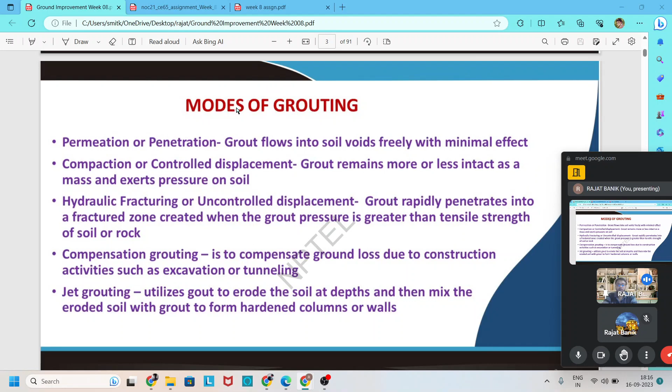The next slide shows different grouting techniques, a schematic diagram of the different grouting techniques. The first one shown here is also about permeation grouting. We apply the grout through the pipe, and no pressure is applied. Through gravity only, the grout material enters or penetrates the surrounding soil, and then the soil is improved.

The next one is compaction grouting, where we apply grouting through pressure, and due to this pressure the surrounding soil may compact. By this way we improve the ground. The third one is hydrofracture grouting. Due to the high pressure, the surrounding soil or rock may crack. After that, the grouting material enters into the surrounding soil and improves the soil or rock.

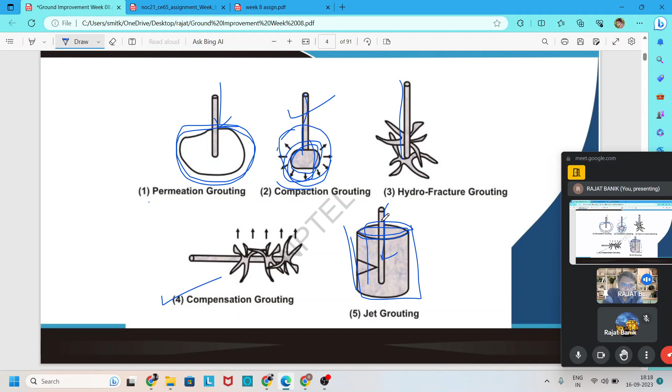The fourth one is compensation grouting. Here we actually apply the grout material into the soil where material is lost due to excavation, and we repair the surrounding soil or fill the material which is lost. Jet grouting is similar - we apply grouting material through a pipe by pressure, and this material mixes with the surrounding soil, forming a hardened column-like structure. By this way we improve the surrounding soil.

Now we discuss the objectives of grouting. Most of these objectives are common to all ground improvement techniques. The first one is densification, to prevent or arrest settlement and mitigate liquefaction. In most cases, the grouting technique is used to densify the surrounding soil, reduce settlement or mitigate liquefaction, and also used for soil solidification to increase the cohesion of granular soil - that is, the bonding between soil particles. To increase the bonding between soil particles, we use this grouting technique.

Then it is used for reduction of permeability and water control. This means the permeability of the soil may reduce due to the application of grouting, because the void spaces and soil pores are filled by the grouting material. Due to this reduction of permeability, water does not flow to that region, and the region may become waterproof. It is also used to stabilize and reduce the expansion of soil, for compensation of lost ground and filling large voids, and for additional support for existing structures.

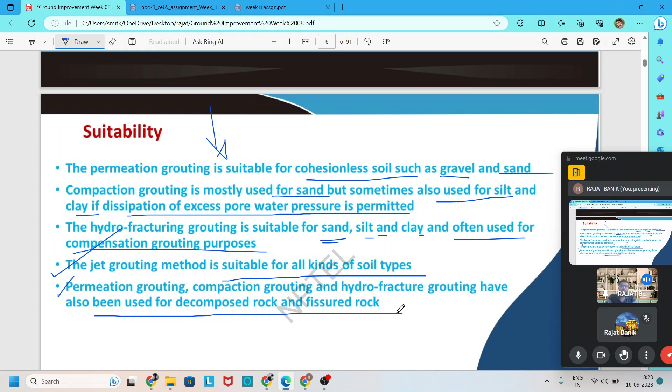This means the rock is gradually decreasing in volume and converting into soil particles. To stabilize or improve that type of rock, most of the time we use permeation grouting, compaction grouting, and hydrofracturing grouting.

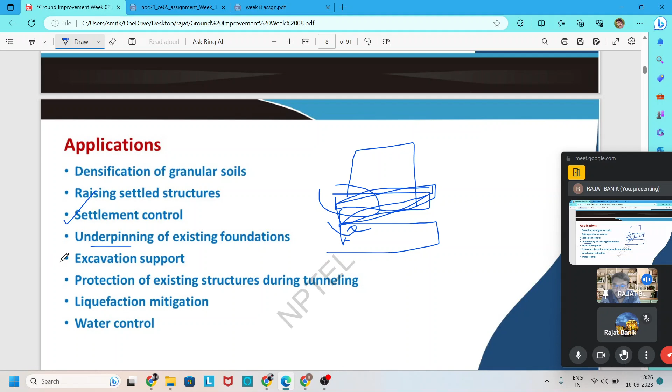It is also used to support excavation. That means if we excavate a tunnel, the tunnel wall is stabilized through this grouting, or by injecting the grouting material. This purpose is also served by this grouting method, and it is also used for protection of existing structures during tunneling, as I already discussed, and also used to mitigate liquefaction.

Liquefaction happens when there is loose sand present and water is not properly dissipated. If we apply the grouting material into the soil, the void space of soil filled with water is filled by this grouting material, and this soil is no longer allowed to retain water there, so the liquefaction phenomena may be mitigated by this grouting technique.

Control of water is similar to liquefaction in that it reduces permeability through injection, so water does not flow through the soil and hence does not hamper the existing foundation. This is how we control water flow into the soil.

Now let's discuss the advantages. With this grouting technique, there is no need to remove or replace the soil of the existing structure or ground. Simply by injecting a chemical solution, we improve the soil.

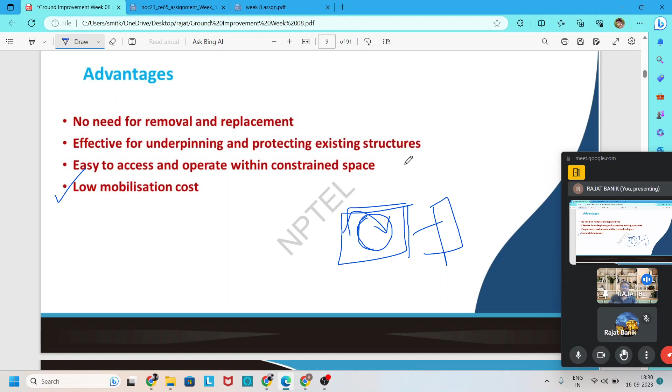The last advantage is low mobilization cost. This means when moving from one point to another, the mobilization cost with this grouting technique is very low.

Now let's discuss some disadvantages. The quantity of grout required is hard to estimate - it is very difficult to understand what amount of grout material is needed to improve the soil.

The effectiveness of the application cannot be predicted. We cannot judge after application how suitable the grouting material is or how much it improves the existing structure, so the area of improvement is sometimes uncertain.

Uncontrolled grouting may cause ground movement and distress to existing structures. Due to the pressure of the grouting material, ground movement may occur, causing settlements in existing structures, and these structures may even collapse if the pressure exceeds the allowable pressure of the soil.

Certain chemical grouts may contain toxicity and have adverse impacts on groundwater and the underground environment - the chemicals mixed with groundwater may toxify it. Also, specialty contractors are required for the operation.

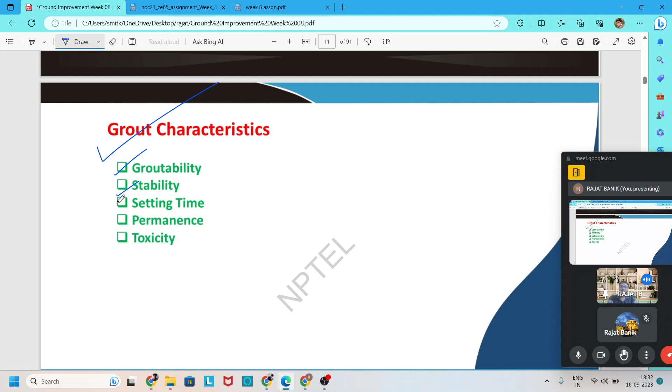Now let's discuss some grouting characteristics: groutability, stability, setting time, permanence, and toxicity. We will discuss these one by one, starting with groutability.

To obtain satisfactory performance, grain size distribution should be known, as it shows the relationship between the grout particle size and the void dimension. This groutability - whether the grouting is applicable to the soil - is mostly based on the grain size distribution, that is, the particle size distribution.

We find out and identify what type of grouting method should be used for a given soil.

We also need to address the pumping pressure - it should not be large enough to disturb the soil particles. When grouting is applied under pressure, the existing soil should not be disturbed; the grouting pressure is limited to 20 kilonewtons per meter square.

The quality of the grout must be sufficiently fluid to enter the soil quickly - fluidity should be maintained to enter the void spaces - but the movement should not be too far.

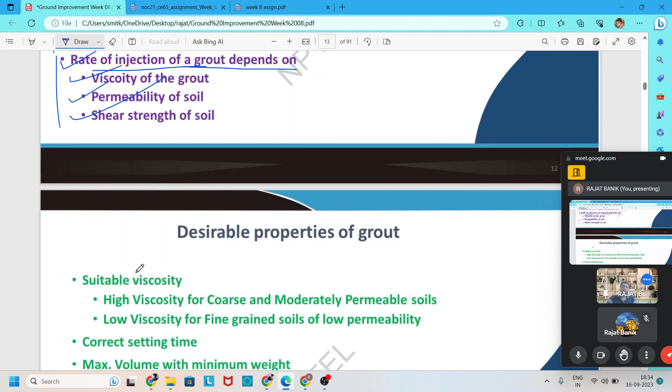Now we discuss the suitability and desirable properties of the grout. The suitable viscosity means what viscosity we maintain when we apply this grouting material. It is said that high viscosity is used for coarse or moderately permeable soil, and low viscosity is used for fine soil of low permeability.

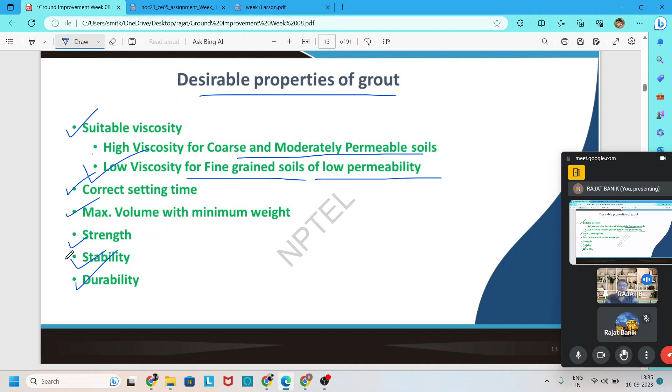Then we also need to adjust the correct setting time, meaning it should not be very slow or very fast. Then the maximum volume within minimum weight, meaning the volume of the grouting material should be maximum with minimum weight. And also we need to adjust the strength, stability, and durability during our application.

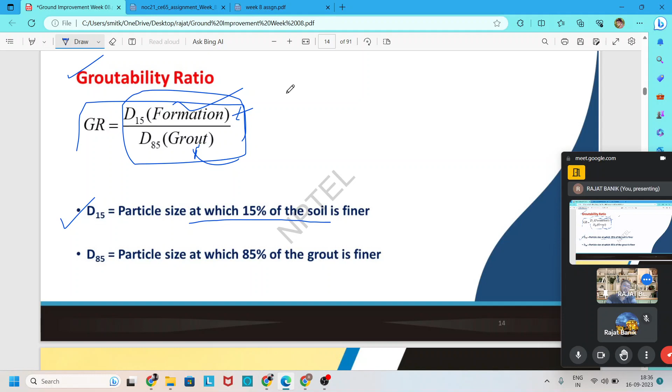This groutability is defined by a ratio called the groutability ratio, which is the ratio of D15 by D85. D15 is used for the formation, that means already existing soil, and D85 is used for the grouting material. D15 is the particle size at which 15% of the soil is finer, and D85 is the particle size at which 85% of the grout is finer. So by this formula we find out the groutability ratio, and based on this ratio we know whether this soil is suitable for a different grouting technique or not.

Now we discuss other characteristics: stability, setting time, permanence, and toxicity. Stability is the capacity of the grout to remain in a fluid state and not segregate into separate components.

Setting time is the time required for the grout to set into a cement mass or gel. It is discussed that early setting time causes difficulty for the grout in reaching its destination. If the grout sets very quickly while we apply it through a pipe, and our targeted depth is further down, it may not reach that targeted depth because it has already set before reaching it.

Also, the setting time should not be very late or slow, because if it is very slow, it causes the grout to be washed away if seepage is occurring through the soil. That means if the setting time of the grout is very large, due to rainy season or water flow or seepage, it may be washed out. So the grout setting time should not be very large either.

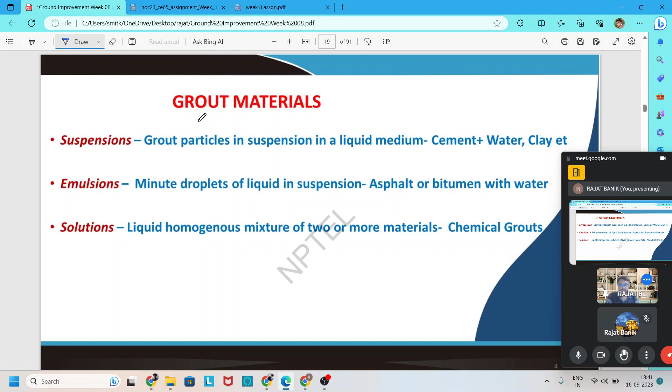Now we discuss one by one this grouting technique based on the material. First one is suspension grout, where we use suspension with cement. It is said that it is unsuitable for cracks or voids narrower than 0.2 mm. If the void is less than 0.2 mm, this method is not suitable. This grouting is usually formed by OPC and water, the mixture of OPC cement, ordinary Portland cement, and water.

The water cement ratio should be maintained between 0.5:1 to 5:1. Rapid hardening cement is used when we apply this grouting into flowing water. And when there is fissured rock, we apply super sulfated cement.

It is also said that admixtures such as bentonite are used to keep the cement particles in suspension. Bentonite, one of the clay minerals, is used during suspension grouting to maintain the cement particles in suspension. The application of this suspension grout is seepage cutoff beneath the dam and groundwater control. We cut the seepage under the dam, and we also use this suspension grout to control the groundwater table.

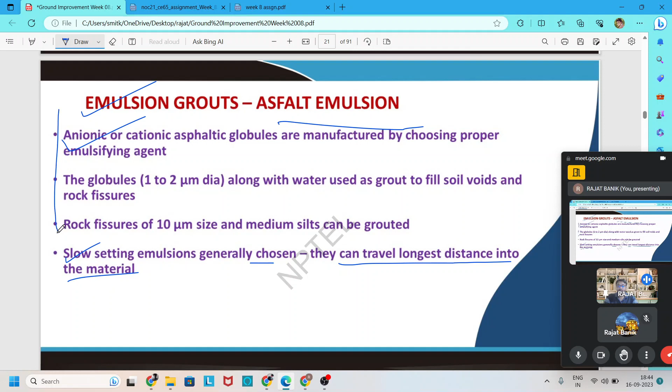Next is emulsion grout, where we use asphalt emulsion. Anionic or cationic asphaltic globules are manufactured by choosing a proper emulsifying agent, and the globules are sometimes 1 to 2 micrometers in diameter. Along with water, this is used as a grout to fill soil voids and rock fissures. Rock fissures of 10 micrometer size and medium silts can be grouted. Slow setting emulsion is generally chosen since it can travel the longest distance into the material. By this way, we apply this emulsion grout into the soil at different points.

Now we discuss the solution grout, which in most cases is chemical grout, called chemical grouting. Chemical grouts like silicate and acrylic resins are used in solution grouting, and this solidifies by chemical reaction alone, solidifying the soil mass. This is used for seepage barrier and stabilization of soil around the tunnel, based on the principle of injection or permeation grouting. By this way, we apply the solution grout into the soil.

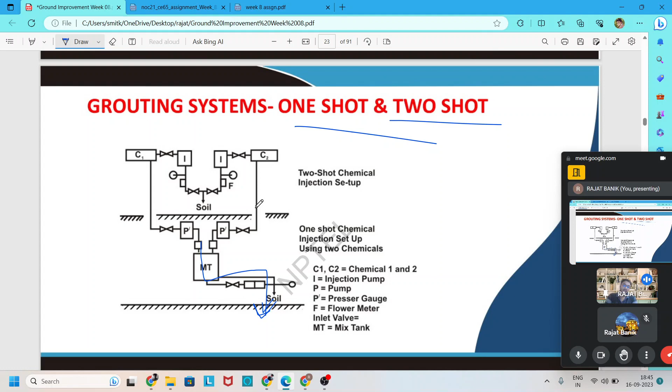Now we show two types of systems applied for chemical or solution grouting. We apply two methods: one-shot method and two-shot method. In the one-shot method, we apply the solution only one time. In the two-shot method, we apply one chemical, and after some time apply another chemical. By this way, we improve the ground.

So we discuss this in tabular form: the one-shot system and two-shot system. In the one-shot system, all chemicals are injected together after pre-mixing. In the two-shot system, one chemical is injected followed by injection of a second chemical, which reacts with the first to produce a gel which subsequently hardens.

In the one-shot system, setting time is controlled by varying the catalyst concentration according to the ground concentration, water composition, and temperature. In the two-shot system, it is slower and requires higher injection pressure and more closely spaced grout holes. By this way, we apply the one-shot system and the two-shot system into the ground.

Now we discuss the grouting procedure: how we apply, by what method we select the grouting technique in the field. This depends on the material to be grouted.

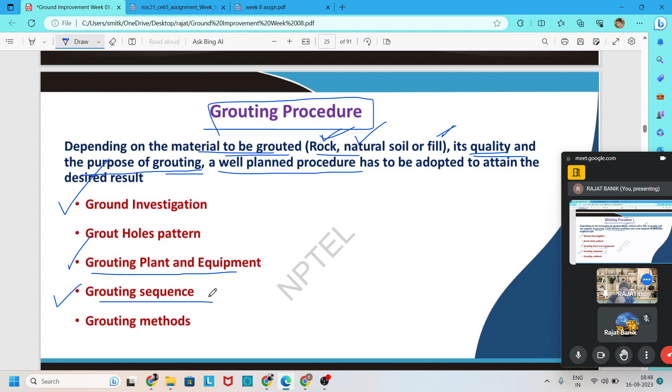So the first one is ground investigation. Most of the time, the preliminary step is ground investigation. It provides information regarding the ground, whether it can be grouted or not, and the choice of grout types and amount, what type of grout is applied and what amount. It also sometimes includes a geological survey, drilling boreholes, and collection of samples for laboratory tests.

Now we discuss the grout holes pattern. Most of the time it is based on the nature of the work, number of drill holes, depth, and pattern to be defined. It follows a grid pattern such that the radius of penetration is sufficient to cause slight overlapping between the adjacent holes.

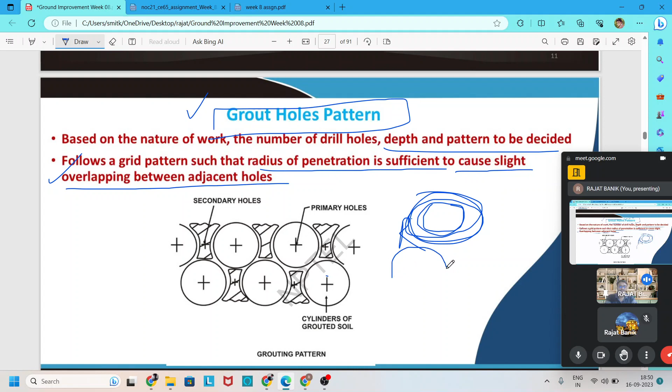We know that the effectiveness of the grouting material cannot be properly found out in practice. So theoretically we find this out, that up to some radius we apply the grout as a circle. But theoretically we find it, while in practical application many factors come into the picture, so this circle may be reduced. As a precaution, the grouting radius should be sufficiently higher, slightly overlapping the adjacent hole. By this way we apply grouting into the field.

So two types of holes are mainly applied. First is primary holes, second is secondary holes. In primary holes we maintain one grid pattern, which you can see here is a triangular pattern. But after applying this grid pattern, some space remains. So to fill this space, we make another hole to apply the grout. This hole is called the secondary hole, used to fill the remaining space.

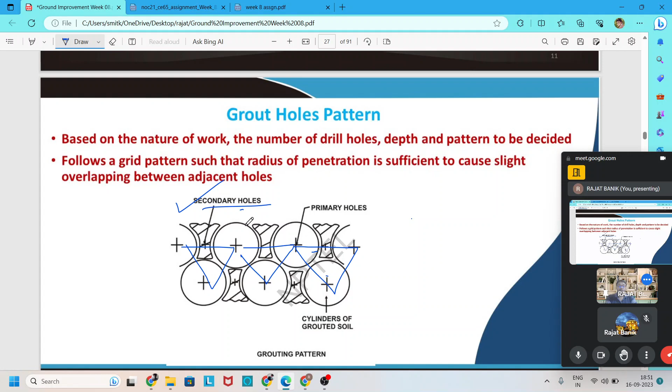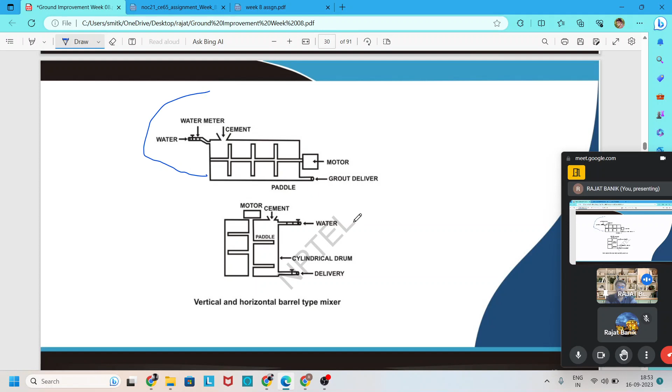Here one picture is shown for the different equipment used during grouting, and also another picture is shown for the mixer, with different plan view and cross section view. The motor is also shown, with cross section and plan view elevation. This picture shows the equipment used in this grouting technique.

Now we discuss one by one the different types of grouting methods: permeation grouting, jet grouting, compaction grouting, whether it is suitable, how it is applied, and hydrofracture grouting as well. So the first one is permeation grouting, which we already discussed a little bit. Please wait a few seconds.

So, permeation grouting.

Grout fills the pores without any volume change. Includes cement grouts, bentonite grouts, and chemical grouts. That means through gravity only, without any pressure, this grouting technique is used.

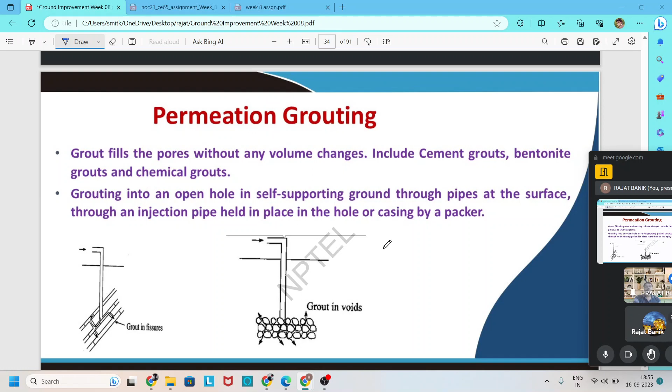So by this way, we apply permeation grout into the soil. You can see here, only through a pipe, grout in fissure or grouting in the pipes in soil. This is applied for the soil, and this is applied for the rock.

Application of the permeation grout: mostly used for seepage control, soil solidification, and stabilization. For seepage control, for making the vertical seepage barrier beneath the hydraulic structure, this permeation grouting is used. Also, to stop seepage through the joints of underground structures such as tunnel lining and basement wall it is used. And for soil solidification and stabilization around the tunnel and shaft, this permeation grout is also used.

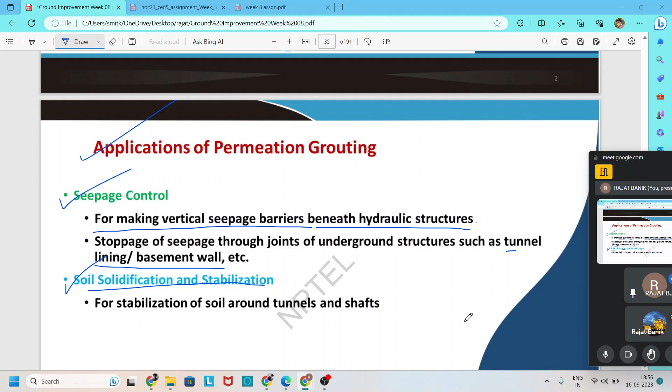Now we come to compaction grouting. It is a good option if the foundation of an existing building requires improvement, since it is possible to inject the grout from the side or at an inclined angle to reach beneath the building.

This type of compaction grout is mostly used for existing structures to improve the soil under the existing foundation and raise the foundation level, because soil degradation sometimes happens after construction, and settlement may occur. So to improve this existing structure, compaction grout is mostly used.

In compaction grouting, a bulb-shaped grout mass is formed. During this process, the bulb-shaped grout mass is formed, and in most cases it is used as a soil-cement grout.

This can also be performed as a pre-treatment before the structure is built. Sometimes we also use this type as a pre-treatment before construction.

Now come to the application. It is mostly used for the densification of loose strata, that means densifying loose soil beneath the foundation, or for floor slab jacking. For this, compaction grout is mostly used.

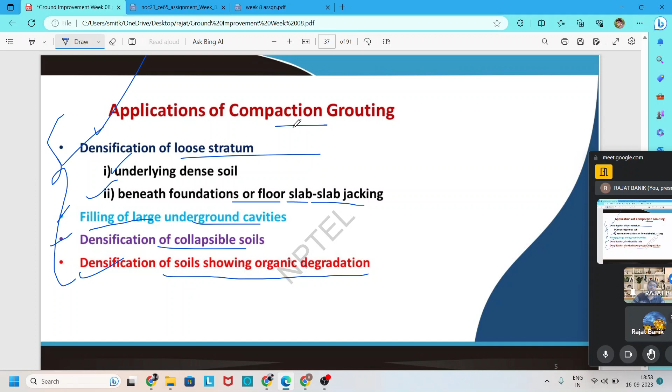Now come to jet grouting. It involves the injection of low viscosity liquid grout into the pore spaces of granular soil. This creates hardened soil to replace loose liquefiable soil.

Jet grouting is used as a replacement technique in which soil ranging from silt to clay and weak rock can be treated. This method consists of lowering a drill pipe into a 150 mm diameter bore. The drill pipe is specifically designed to simultaneously convey pumped water, compressed air, and grout.

Three systems of jet grouting are applied: single, double, and triple. Here three pictures are shown. The first is single jet grouting, the second is double jet grouting, and the third is triple jet grouting.

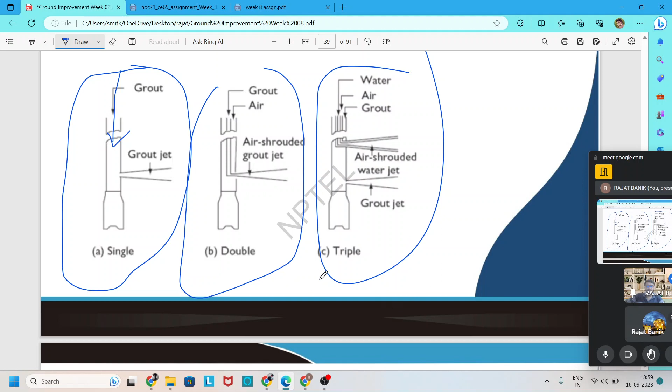In single jet grouting, we apply only the grout material. In double jet grouting, we apply grout and also compressed air. In triple jet grouting, we apply water, compressed air, and also the grouting material. So in these three different ways, we apply the grouting material by the jet grouting technique.

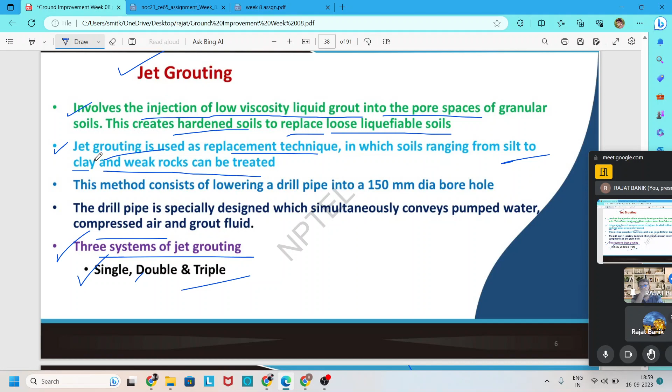Now we discuss the application of the jet grouting technique. It is mostly used for groundwater control, to prevent flow through the sides or into the base of an excavation, or to control groundwater during tunneling, to prevent or reduce water seepage through water retention structures such as dams or flood defense structures, and also to prevent or reduce contamination flow through the ground.

In these different ways, we control groundwater through jet grouting. Another application is for movement control, used to prevent ground or substructure movement during excavation or tunneling, and also to support the face or sides of the tunnel during construction or in the long term.

It increases the factor of safety of embankments or cuttings, and it provides support to piles or walls to prevent or reduce lateral movement.

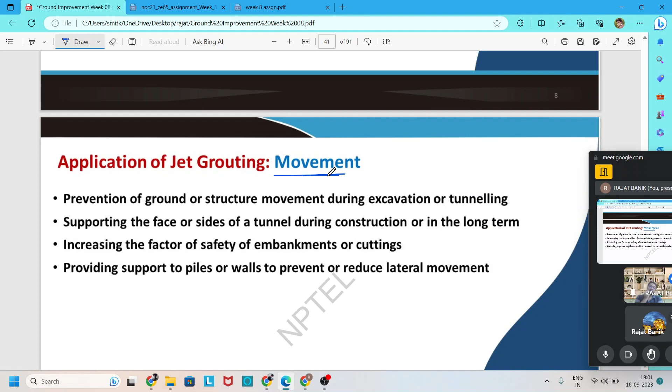It is also used as a support, for underpinning buildings during excavation or tunneling, to improve the ground to prevent failure through inadequate bearing, and to transfer foundation load through weak material to a competent stratum.

It is also used for environmental purposes: capturing contaminants in the ground to reduce or prevent contamination spreading into sensitive water systems, providing a lateral or vertical barrier to contaminated flow, and introducing reactive material into the ground to treat specific contaminants by creating permeable reactive barriers.

So this jet grouting technique has a wide number of applications: controlling groundwater, controlling ground movement, providing support, and serving environmental purposes. This is one of the most important techniques for grouting, and jet grouting can be used for a wide range of soil particles - basically any type of soil can be improved using jet grouting.

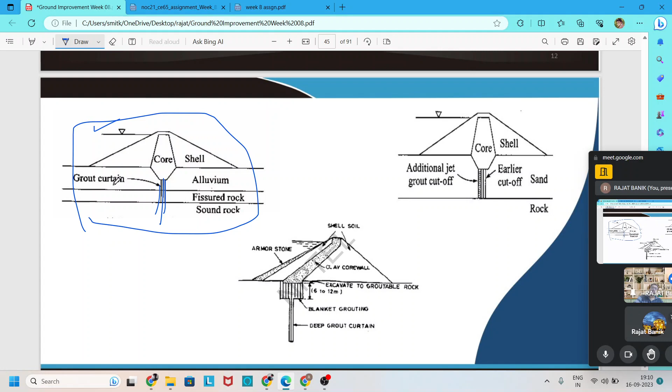Here some figures are given. Most of these figures are for dams, like earthen dams. To cut the seepage, mostly below the dam, we use this type of grouting technique. We can say first here it is grout curtain - here you use jet grout cutoff, here you use blanket grouting or deep grout curtain.

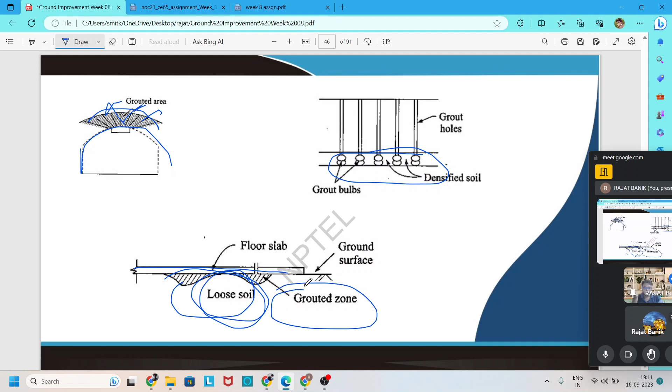There are other pictures shown here for jet grouting, showing this bulb-like structure - that means compaction grouting is applied through this bulb-like structure, and we improve the ground. One picture also shows an existing foundation, where below this existing foundation through a pipe, by grouting we improve the existing soil and improve the ground.

Now we discuss the theory of injection - that means the injection pressure, the radius of the influence zone of the grout material, and the height of the grouting pipe. We discuss these one by one now.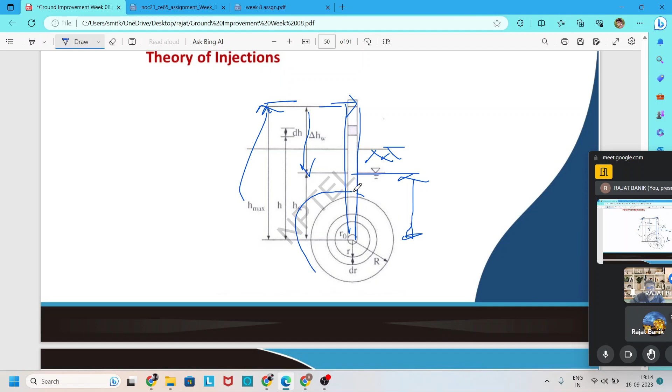First, the theory of injection. We can say there is existing soil present, and the groundwater table is at a certain level, and we need to improve the soil below the groundwater table. A pipe is inserted, and through this pipe the grout material is injected under some pressure. The pressure head before applying the grouting is H max, and after some time this pressure reduces and comes to the height of the groundwater table. Due to applying this grouting material through the pipe, the grout material spreads to the surrounding soil, and the maximum distance it covers is R - that means one circle is formed up to that much distance.

We can say the grouting material penetrates into the soil. So it is a theoretical base, meaning some assumptions we can make to find this out.

The first assumption is that the ground is uniform and isotropic. Most of the time we assume that, and also assume that the grout is Newtonian fluid.

We know in fluid mechanics there are different types of fluid: Newtonian and non-Newtonian. Newtonian fluid is proportional to the shear strain, rate of shear strain, but non-Newtonian fluid is not proportional to the rate of shear.

So here the assumption is that the grout material is Newtonian fluid, but most of the time it is not true. Then another assumption is that the grout is injected from the bottom of the pipe, meaning at the bottom only the grouting material is injected. The grout penetrates to a radius r, spherically.

That means we assume one sphere is formed when we apply the grout material through a pipe. Due to spray, the radius of the sphere is r, we assume. So now we apply Darcy's law.

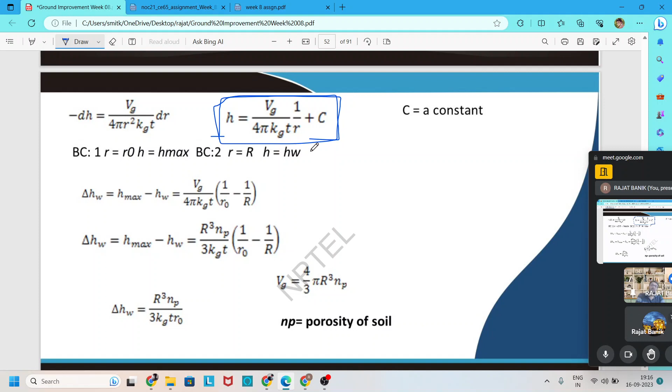Now we apply integration and come to one formula: h is equal to Vg by 4 pi k g T into 1 by R, plus C, a constant. H here is the height, any arbitrary height from where we apply this grouting material into the soil.

And R is the penetration radius, meaning up to what distance this grouting is penetrated. We assume it is smaller.

Now we apply the boundary conditions. The first boundary condition is that R is equal to R naught and H is equal to H max. The second boundary condition is R is equal to capital R, H is equal to HW.

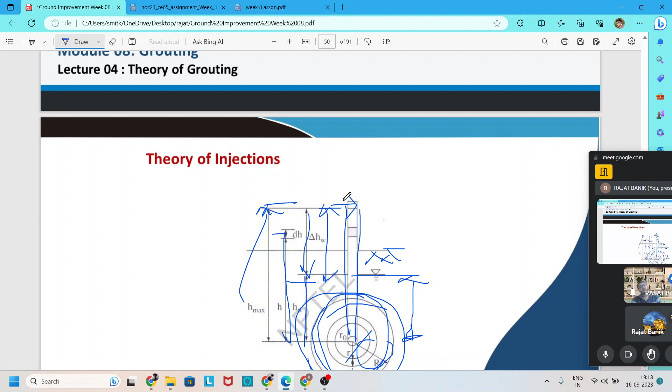Here HW is the height of the groundwater table from the grouting point, and del HW is the head difference between the grouting pressure and the water table.

After putting in all the boundary conditions, we come to one formula: Hmax minus Hw, that means del H. And if we replace Vg by the volume of the sphere, that means 4 by 3 pi r cube into Np.

Np here is nothing but the porosity of the soil, meaning how much void is present. We replace Vg by this formula and, after simplifying further, we come to the final form of this formula.

That means del HW is equal to R cube into Np divided by 3 kg T, divided by R naught, where R is the maximum distance or radius covered by the grouting material, Np is the porosity, Kg is the permeability coefficient of the grouting material, T is the time taken for penetration, and R naught is the radius of the grouting sphere.

Now we modify this formula for our different needs. First we modify it to find the time T, and then we modify it to find the radius of penetration, the mixing radius, of the grouting material.

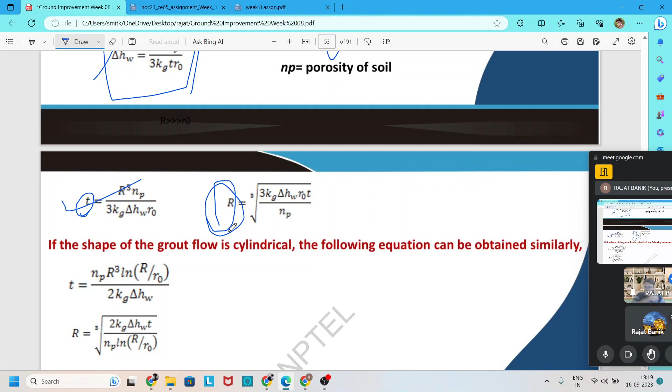All the formulas discussed until now are based on the assumption of spherical flow, meaning after applying the grouting material, one sphere is formed. But sometimes this sphere is not formed; sometimes a cylinder is formed instead.

For that, we modify our formula based on the cylinder, modifying the time T and the radius R. So by these two formulas, we easily find the time and radius for the cylindrical pattern or shape of the grouting.

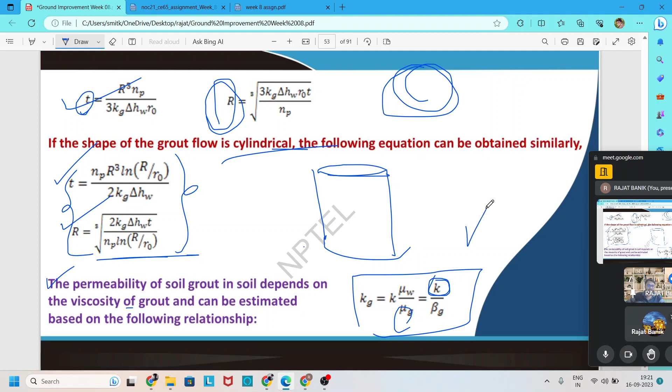One point given is that the permeability of the soil grout depends on the viscosity of the grout and can be estimated by this relation: Kg equals K into mu W by mu G. This can be further modified using K by beta G, where K is the permeability of the soil, mu W is the viscosity of water, mu G is the viscosity of the grout, and beta G is the ratio of mu G by mu W.

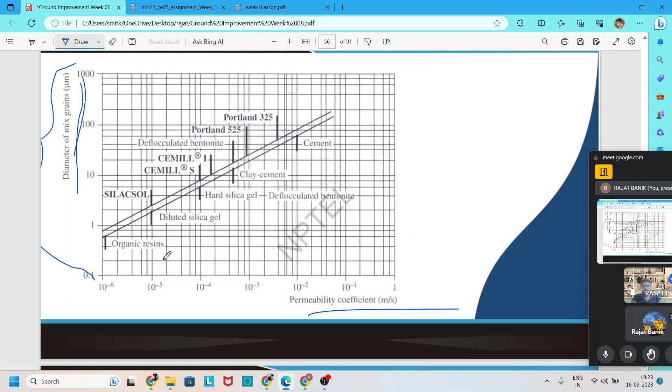Now we come to another grouting technique called compaction grouting. In compaction grouting, we inject a stiff or low mobility grout to apply pressure on the surrounding soil and displace the soil particles. A grout bulb is formed around the grouting source. If the grout bulb is simplified as a sphere, the pressure within the bulb is equal in all directions.

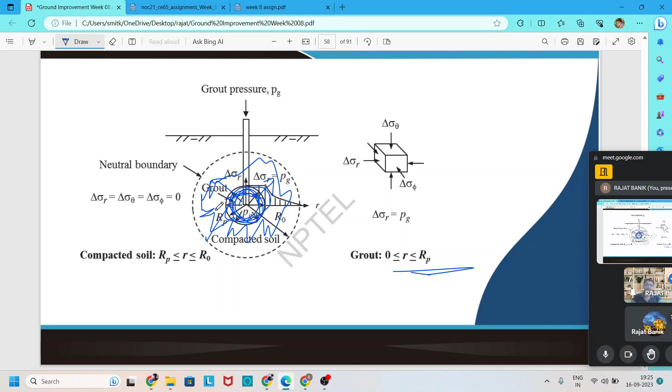It is said that for compacted soil, R is between RP and R naught, that is, RP less than or equal to R less than or equal to R naught. That range is for compacted soil, and the rest is for the grout itself. Once the grout solidifies, it creates pressure on the surrounding soil. Due to this pressure, the surrounding soil gets compacted and modified, and by this way we improve the ground.

It is said that under the applied pressure, the soil within the influence range deforms and accumulates a volumetric strain, epsilon V. This volumetric strain can be calculated based on the volume of the grout, V suffix G, and the initial volume of the soil within the influence range, V suffix I. Applying strain theory, we find epsilon V equals the volume of the grout divided by the initial volume of the surrounding soil.

We also find the soil bulk modulus, which equals pressure divided by strain. Based on this formula, we find the soil bulk modulus, where P suffix G is the grout pressure. By this way, we find the soil ground bulk modulus during grouting.

Now we find the change in unit weight due to applying the grouting material, that is, how much the unit weight changes. We find that del gamma equals WS, the total weight of the soil, divided by the change in volume, minus the initial unit weight.

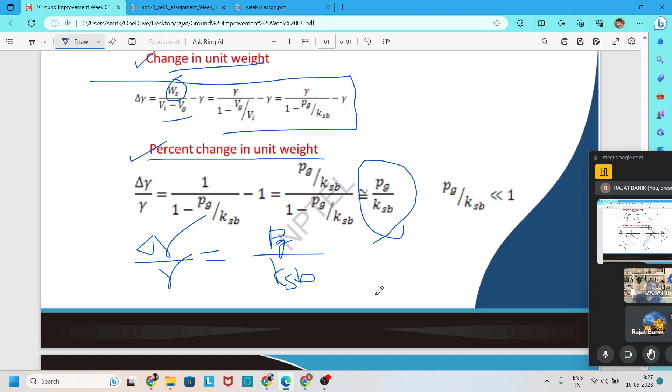By this way we arrive at this formula, and then we find the percentage change in the unit weight, that is, up to what percentage the unit weight changes. We come to the formula: percentage change in unit weight due to initial unit weight equals the pressure of the grouting material divided by the soil bulk modulus. By this formula we find the percentage change in unit weight.

Now we find out the force which is applied during the jet grouting, or during the formation of the jet grouted column. So the erosion of soil by jet grouting mainly relies on the impact force produced by the grout.

The force of the jet in air can be expressed as P equals rho g Qg into Vp, where rho g is the density of the grout, Qg is the discharge of the grout, and Vp is the average velocity of the jet grout. If you replace Qg with small v into A naught, where A naught is the cross sectional area of the nozzle, then the total force during the jet grout is equal to rho g into A naught into V square. So by this formula, we find out the impact force during the jet grout.

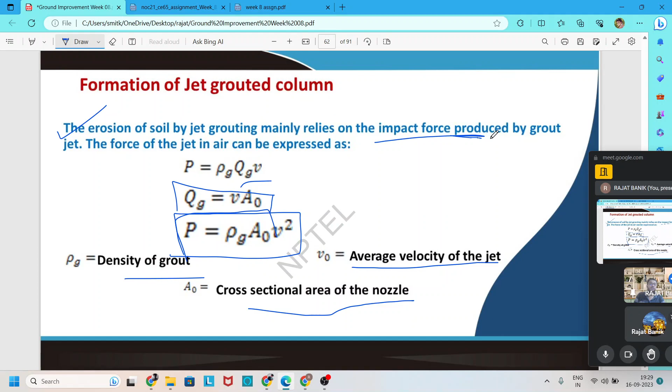Now we discuss the design consideration of the permeation grouting. So for designing the permeation grout, we first consider the groutability.

To measure the groutability, we ensure the groutability of the grout into the soil or rock based on two parameters proposed by Mitchell and Katti, based on Terzaghi's filter criteria. These two men modified the Terzaghi filter criteria and gave two parameters for groutability, one for soil and one for rock. So first for soil: the groutability is equal to D15 of soil divided by D85 of the grout.

And the groutability for rock is equal to TF divided by D95 for grout, where TF is the width of the fissure in rock. Here D15 is the percentage of soil particles finer than 15%, and D85 for the grout is the percentage of grout particles finer than 85%. Similarly, D95 is the percentage of grout particle size which is finer than 95% for the grout.

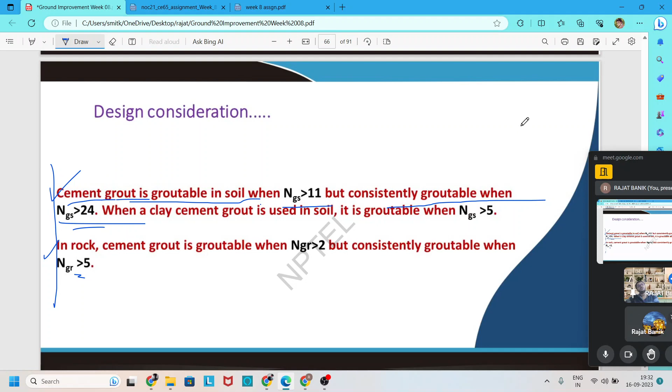Now we find out the required head for this grouting for the Newtonian fluid, and we consider that the soil is uniform and isotropic, and we find out the penetration radius also. Consider the penetration radius R as spherical flow is formed, and we find out the head difference, which is given by Raffle and Greenwood in 1961.

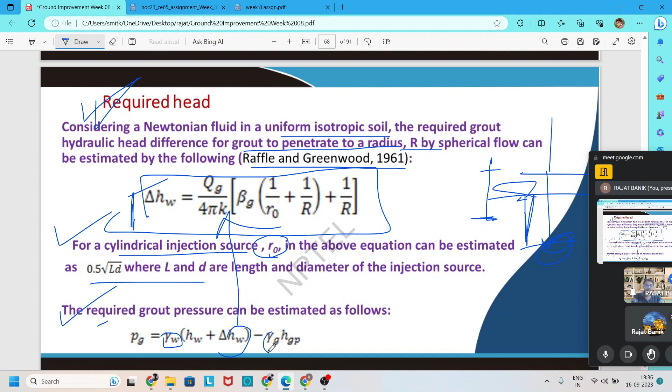That means gamma W is the unit weight of water, HW is the height of the water table from the point of grout. If we apply here and the water table is up to there, then this height is HW, and del HW is the head difference, which is found out by this formula. Gamma G is the unit weight of the grout material.

HGP is the height of the grout material injection from the injection point. It means if we apply this grouting material through a pipe from this point and we reach up to this point, this is the edge from this point. This you can see in the drawing. All the above terms are discussed here, no need to further discuss elaborately.

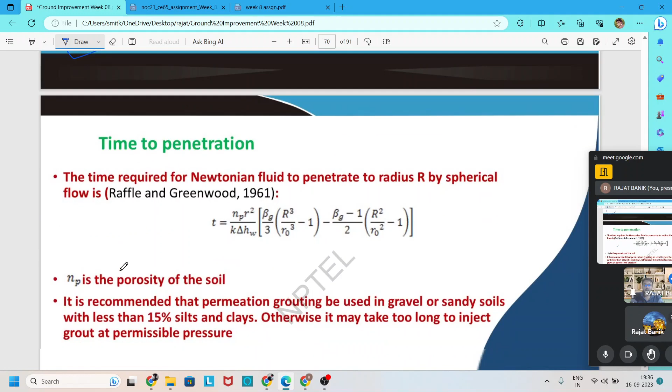Now, further by this formula, we modify to find out different other parameters. If you modify this del HW, you can find out the time period required, or time required, to penetrate the full radius R.

So it is found out by this formula, and here NP is given as porosity.

One point is given here: it is recommended that permeation grouting be used in gravel or sandy soil with less than 15% silt and clay. Otherwise, it may take too long to inject grout at a permissible pressure. That means when we apply the permeation grout through a pipe, the soil should be permeable in nature, that means gravel and sandy soil.

If any silt or clay is present, the percentage of clay should be less than 15%. If it is greater than 15%, the pore space is reduced and more time is required to penetrate into our targeted soil. So this method is only suitable when the soil contains less than 15% silt.

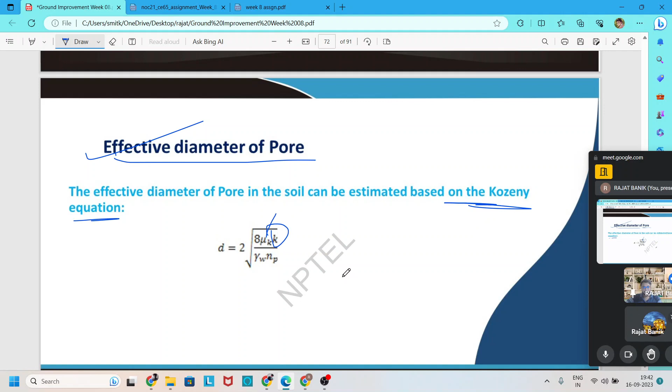Now come to one formula to find out the effective diameter of the pore. This formula is given by Kozeny, also known as Kozeny's equation to find the diameter of the pore. It is given that d equals 2 times root over 8 times mu k times k divided by gamma w into n, where mu k is the viscosity of the grouting material, k is the permeability of the soil, gamma w is the unit weight of water, and n is the porosity of the soil.

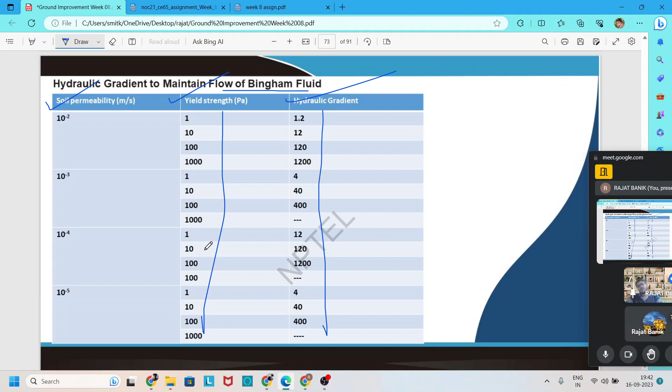Based on this formula, one chart is given for this Bingham fluid, which varies with permeability of soil, yield strength, and hydraulic gradient. By this chart, we can easily find out the soil hydraulic gradient for different soil permeability, and also find out the hydraulic yield strength of the Bingham fluid.

Now we find out the allowable grout pressure. When the grout is a Bingham fluid, it requires much higher grout pressure. The injection pressure should be limited to avoid ground heave. Allowable injection pressure can be estimated as PGA equals 100 times alpha P times P plus CGS times beta GM, lambda ST, into Z. By this empirical formula, we can find the allowable pressure of the surrounding soil. We know that when we apply the Bingham fluid, higher pressure is required, but if we apply higher pressure and it overcomes the allowable pressure, then ground heave may be created, which is not suitable for the ground. Due to creation of the ground heave, surrounding soil may be disturbed and any existing structure may collapse.

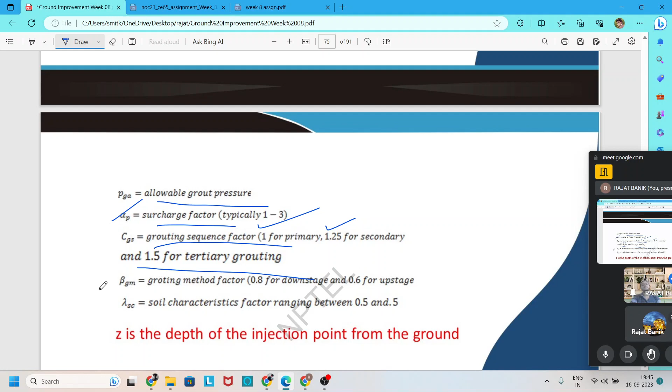So here PGA is the allowable grout pressure. Alpha P is the surcharge factor, typically between 1 to 3. CGS is the grouting sequence factor, which is 1 for primary, 1.25 for secondary, and 1.5 for tertiary grouting. Beta GM is the grouting method factor, 0.8 for downstage and 0.6 for upstage. Lambda SC is the soil characteristics factor, ranging between 0.5 to 5, and Z is the depth of the injection point from the ground. By this formula we can easily find the total allowable pressure which the ground can take safely.

Now it is given that the estimated allowable grout pressure should be verified in the field by performing the grouting trial test. That means before starting our grouting technique, some trial tests should be made. Due to this trial test, we can easily estimate the total allowable pressure, whether it is more than our ground pressure or less. If it is less, then it is suitable. If it is greater than our allowable pressure, then ground heave may be produced due to the change of ground volume.

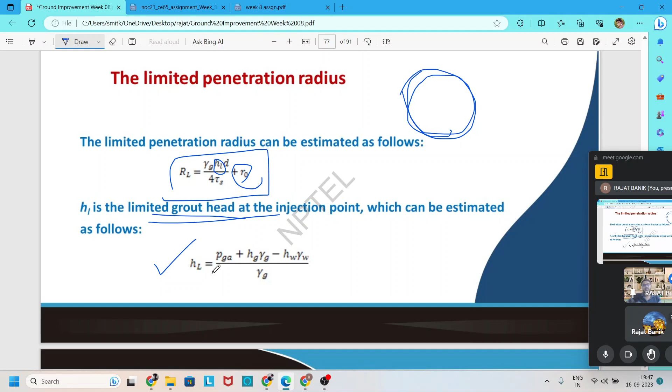You can find out HL, which is limited grout head, by this formula: PGA plus HG gamma G minus HW gamma W, divided by gamma G. By this formula, you can easily find it.

Another formula is given by AFTES 1991 for finding the penetration radius, R, which is equal to the root of R Vg, that is volume of the grout, divided by Np by Lg. Np is the porosity of the soil, and Lg is the thickness of the injected section of the pass length, that is, up to what depth the grouting material has penetrated. If we consider a cylindrical pattern, then the length of the cylinder is Lg, representing how much depth the grouting material penetrates.

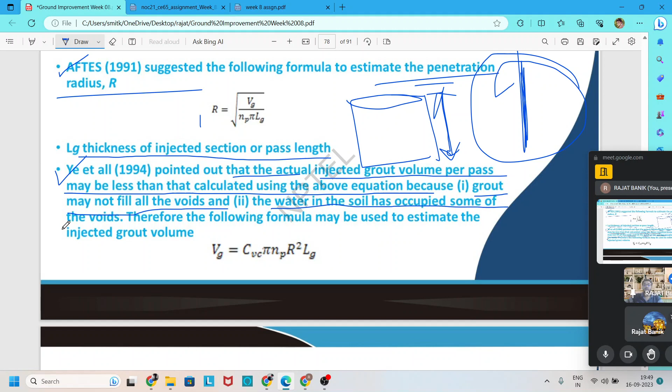Another scientist, Ye et al. 1994, pointed out that the actual injected grout volume per pass may be less than calculated using the above equation, because the grout may not fill all the voids, and water in the soil may occupy some of those voids. In theory what we calculate is not applicable in the field, because the actual volume of the grout should be less than the theoretical volume. The void space may not be fully filled by the grouting material, and sometimes it may be occupied by water instead. So due to these two reasons, the actual volume of grouting is reduced.

So we modify our formula by multiplying a correction factor. If we consider the cylinder formed during grouting, Vg is equal to pi r square into Lg, and applying for void space, we multiply it by the porosity. This theoretical way gives the total volume of the grouting material. But in the field, a correction factor is needed, and we multiply this correction factor with the actual theoretical volume, denoted here as C suffix VC.

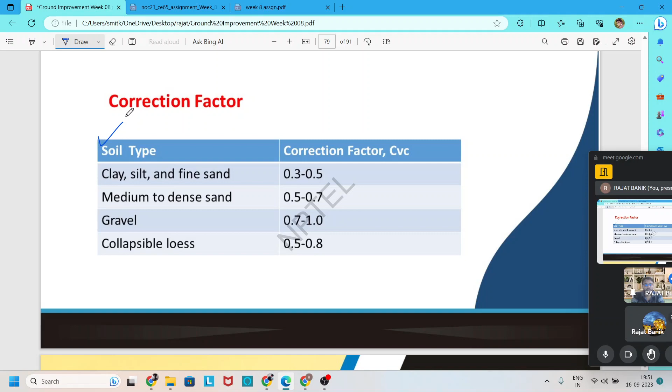A table is given for finding this correction factor for different soil types. For clay, silt, and fine sand, the correction factor is 0.3 to 0.5. For medium to dense sand, it is 0.5 to 0.7. For gravel, it is 0.7 to 1, and for collapsible loess soil, it is 0.5 to 0.8.

Now we discuss the grout hole pattern and spacing. In the field, what pattern is used and how much spacing is given, we discuss now.

Most of the time we use two types of patterns: one is triangular, another is square. The grout hole pattern and spacing discussed above apply for permeation grouting. Here the pattern is given for permeation grouting, and it is said that the grout hole spacing should be based on the grout penetration radius and the complete coverage of the grout area within the improved depth.

Depending on the application, grout holes may be arranged in one row or multiple rows. For one row of grout holes as shown in the figure, the effective thickness of the grout area can be calculated as follows: when we apply grouting only in one row, arranged this way, we find the effective thickness using this formula.

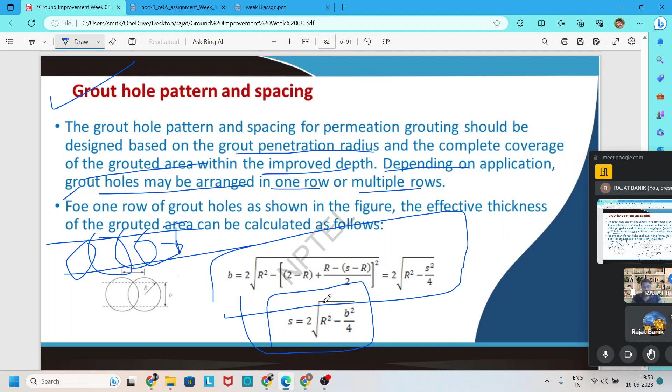So here it is given two patterns: one is triangular pattern and another is square pattern. When we apply this triangular pattern, it is best suited for grouting technique because it covers all the area of the surrounding soil, so no need to apply any further grouting point.

But when we apply grouting in square pattern, two stages are needed: first is primary stage, second is secondary stage. In primary stage, we apply grouting in square pattern. After that, in the middle, one void area remains, so to improve this remaining area, we apply another grouting point. By this way, we improve our soil in square pattern.

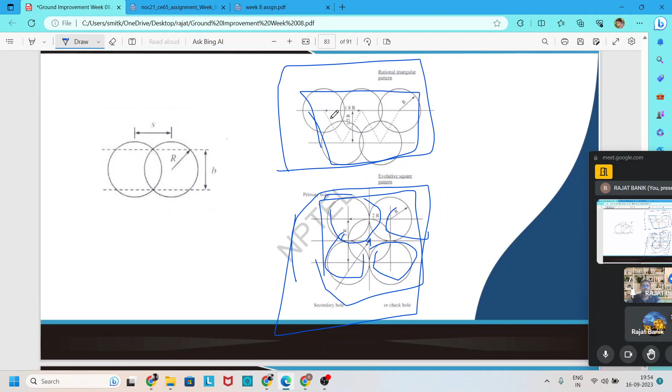So the same point is given for multiple rows, meaning more than one row is used, like in square pattern and triangular pattern. For two rows of grout holes, the two patterns shown in the figure can be used. Triangular pattern includes all primary holes, no need to use secondary holes, but square pattern requires primary holes and secondary holes to cover all the improved area.

For triangular pattern, the horizontal and vertical spacings are 1.8r and 1.5r respectively, where r is the maximum radius of penetration of the grouting material, considering a cylinder or square. For square pattern, the horizontal and vertical spacing are both 2r, and there is a secondary hole in the middle for every four primary holes. This is how typical grout spacing can be found.

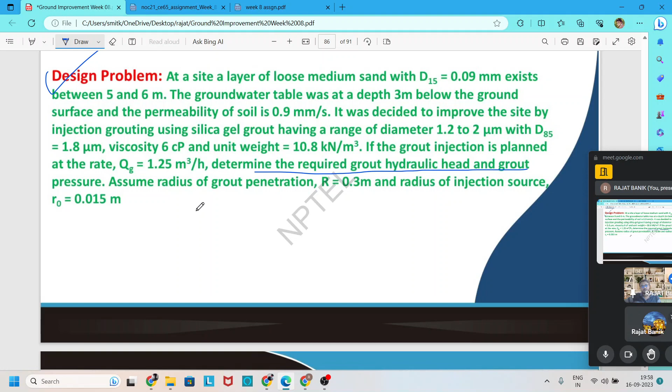Unit weight of grout is given as 10.8 kilonewton per meter cube. If the grout injection is at a rate Qg equal to 1.25 meter cube per hour, determine the required grout hydraulic head and the grout pressure. Assume radius of grout penetration R equal to 0.3 meter and radius of injection source R naught equal to 0.015 meter. So we have to find out the hydraulic head required, and also the grout pressure, using this data. Let's try to solve this.

First, we consider several issues like soil type, toxicity, and cost. Suppose silicate solution is used for grouting. We know that this silicate grouting solution comes under the Newtonian fluid category, so no need to apply the formula for Bingham fluid; we only apply the formula for the Newtonian fluid.

First we find out the groutability ratio, to check whether it is suitable for grouting or not. The groutability ratio is found by D15 of soil divided by D85 of the grout, with one correction factor. By putting all the values, we find the groutability ratio comes to about 50. We know that for soil cement, groutability should be greater than 24, and here it comes to about 50, which is greater than 24, so the soil is groutable.

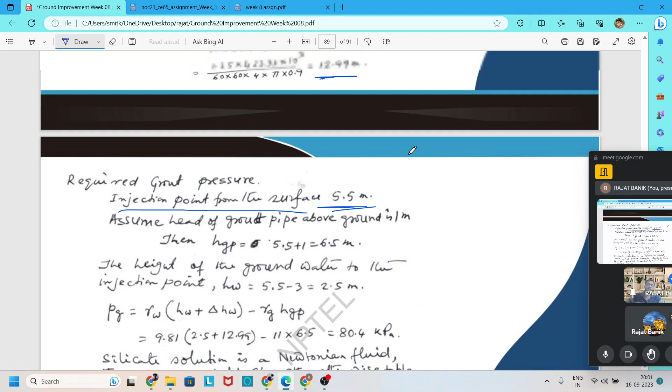Now we assume that the injection point from the surface is equal to 5.5 meter. How is it coming? We know that the improvement zone is in between 5 to 6 meter, so we simply average these 5 and 6, and it comes about 5.5 meter. So by this formula we easily find out the injection point from the surface is equal to 5.5 meter.

And we assume that the head of the grout pipe above the ground is 1 meter. So then the HGP, that is the limited height of the grouting from the surface, from the injection point, is about 6.5 meter. That means 5.5 plus 1 meter.

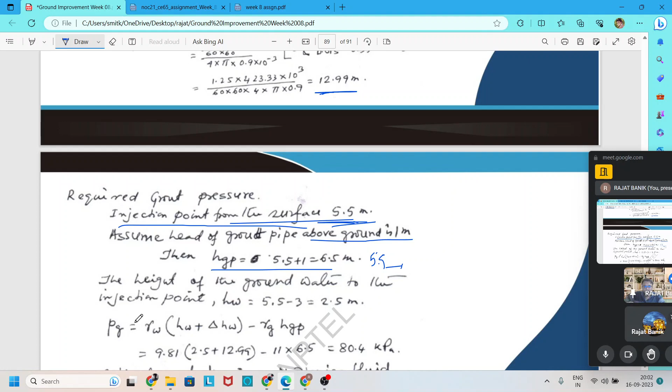And now we find out the HW, that is the injection height of the groundwater table from the injection point. So it comes about 5.5 minus height of the water table from the surface, so it comes about 2.5.

After that we find out the pressure required for the grouting or injection of the grouting. So by this formula, Pg is equal to gamma W into HW plus del HW, minus gamma G into HGP. By this formula we can easily find out, and it is coming about 80.4.

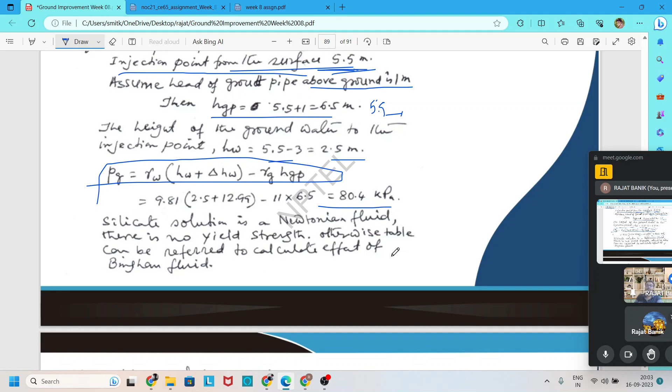Now we find out whether this 80.4 pressure is suitable for our ground or not. We know that the silicate solution is a Newtonian fluid, so no need to find out the yield strength, and we know that the yield strength is zero. So we don't need to modify our formula for the Newtonian fluid.

We directly put our formula for finding out the allowable ground pressure, and we consider all the values: alpha p is equal to 2, p of surcharge is 0, cgs for grouting is considered for primary as 1, beta gm for grouting method is considered as 0.8, and soil characteristic is considered as 1.5.

We easily find out the allowable pressure of the soil, and it is coming about 220 kPa. So our grouting pressure is about 80.4 kPa, so it is less than 220 kPa. So the soil easily takes care of this grouting pressure, and there is no heaving created, and it is safe for this type of soil.

So by this slide we finish our grouting technique discussion. In this session we discussed about the different types of grouting, what is grouting, different types of grouting and where it is applied, and also discussed different grouting theories for Newtonian fluid and Bingham fluid, and we also tried to solve one problem.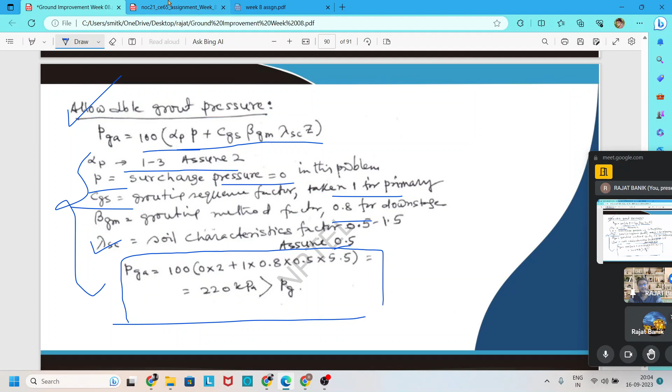Now we try to solve a previous year assignment problem. So in the previous assignment, it is now solved. First question: the objectives of grouting are densification to prevent or arrest settlement and mitigate liquefaction of soil, solidification to increase the cohesion of granular soil, and reduction of permeability of water. So the correct answer is all of the above.

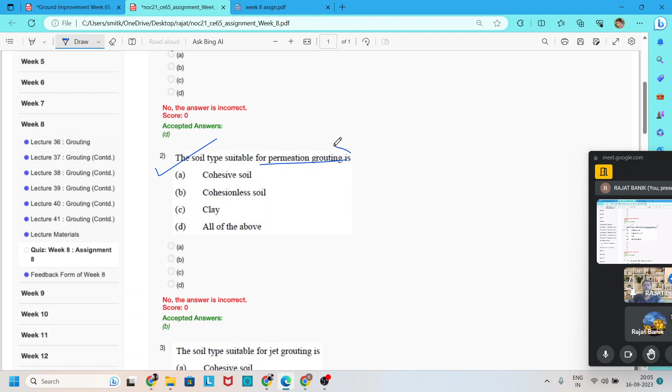Second question asks about the soil type suitable for permeation grouting. We know that permeation grouting is mostly suitable for cohesionless soil. The correct answer is option B.

The third question asks about the soil type suitable for jet grouting. We know that jet grouting is applicable for all types of soil, so the correct option here is option D.

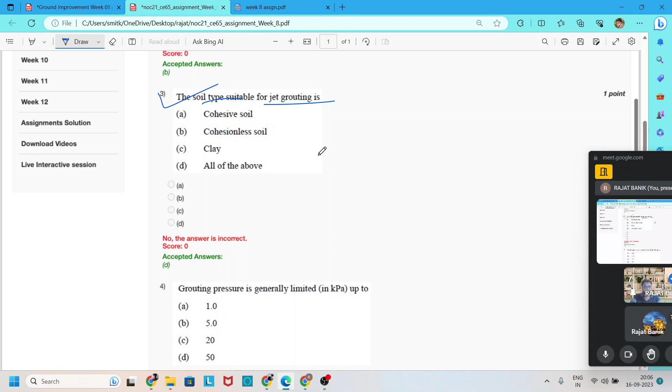Question 4 asks that grouting pressure is generally limited up to what value, up to 20 kPa. The correct option here is option C.

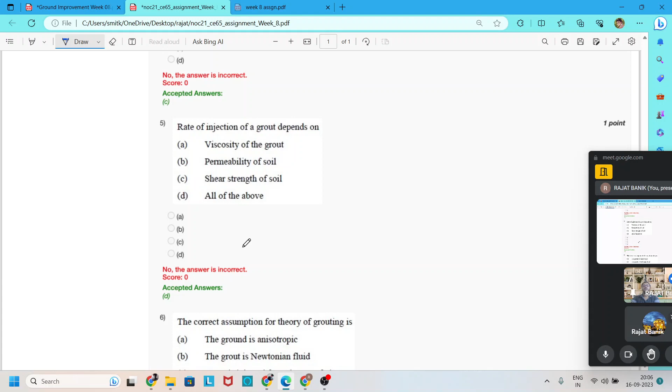Question 5 asks that rate of injection of grout depends on viscosity of the grout, permeability of the soil, or shear strength of the soil. We know that every option is correct, so the correct option here is option D.

Question 6 asks about the correct assumption for the theory of gravity grouting. The first option given is that the ground is anisotropic, which is wrong — we consider the ground is isotropic. The second one is that grout is Newtonian fluid, which is correct. The third one states grout is injected from the top of the pipe, which is wrong; the correct assumption is that it is injected at the bottom of the pipe. So the correct option here is option B.

Now one problem is given in option 7: a soil has a particle size corresponding to 15% passing, that is D15 is given equal to 1 mm. To have a consistently groutable rough soil, the cement grout groutable ratio is given as 25.

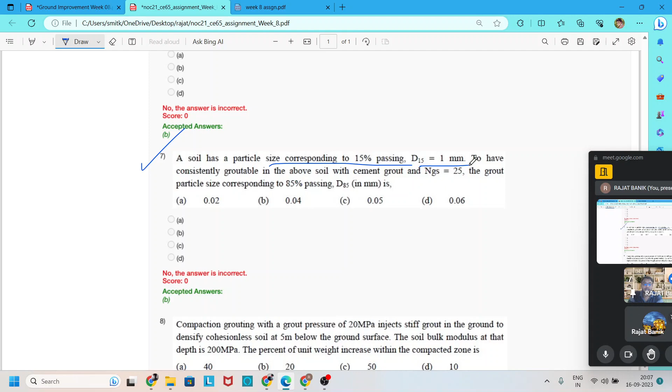Find out the particle size for D85, or 85% passing. We know that the groutability ratio is equal to D15 by D85, where D15 is for soil and D85 is for grout. Using this formula, we find D85 is equal to 0.04 mm. So the correct option is B.

In question 8, find out the compaction. Compaction grouting with the grouting pressure given is 20 MPa. Inject stiff grout in the ground to densify the cohesionless soil at 5 meters below the ground surface. The soil bulk modulus at that depth is 200 MPa. Find the percentage of unit weight increase within the compacted zone.

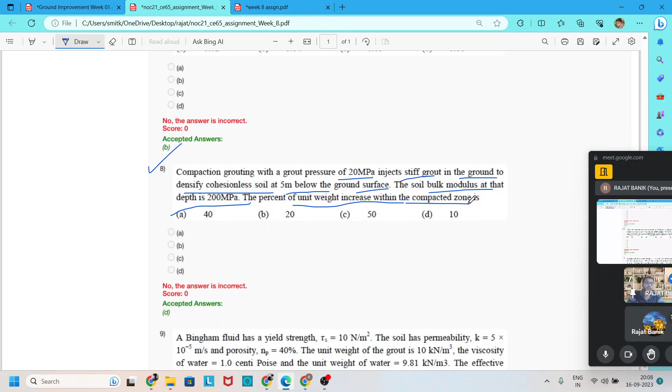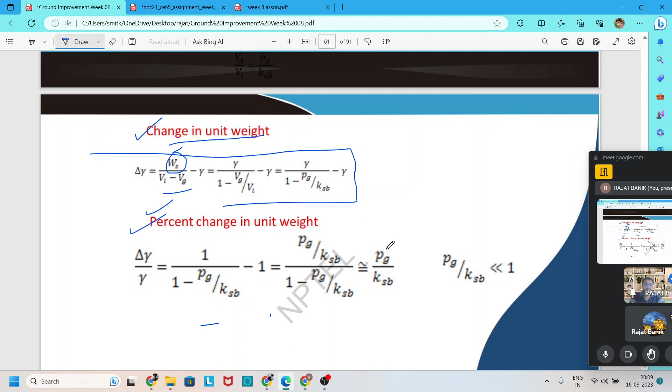During our study of grouting, we find that the percentage change of unit weight is equal to Pg divided by Ksb, where Pg is the grouting pressure and Ksb is the soil bulk modulus. Putting in the values, Pg is 20 and the soil bulk modulus is 200. So the percentage increase of unit weight is 10%. The correct option is D.

Now question 9. A Bingham fluid has a yield strength tau s equal to 10 Newton per meter square. The soil has permeability K equal to 5 into 10 to the minus 5 meter per second. Porosity Np is equal to 40%. The unit weight of the grout is 10 kN per meter cube. The viscosity of water is 1 centipoise, and the unit weight of water is 9.81 kN per meter cube. Find the effective diameter of the pore in the soil based on the given equation.

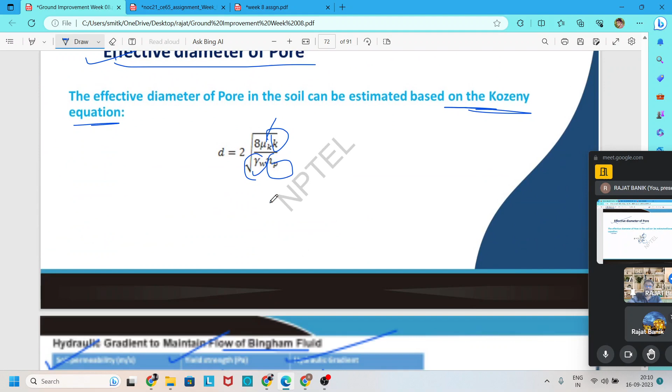We know the Kozeny equation given for the Bingham fluid to find the effective pore diameter: D is equal to 2 times the square root of (8 mu k times k) divided by (gamma w into n). After putting all the values into this formula, we find the effective pore diameter is equal to 0.02 mm. So the correct option is A.

Now the last question of our assignment problem, and also the last of our discussion: for the given data of question 9, find the minimum pressure gradient needed to overcome the yield strength. Here the pressure gradient is nothing but the minimum hydraulic gradient.

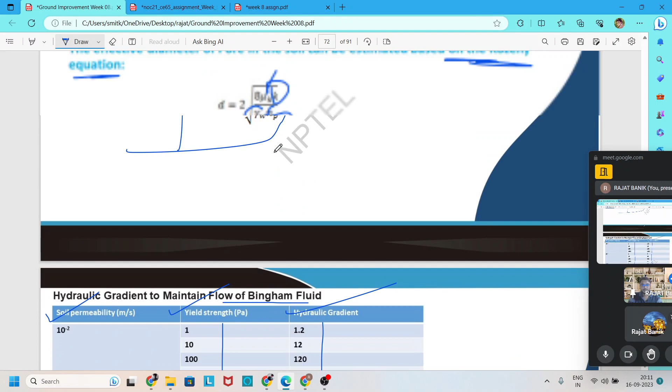For a Bingham fluid, we know that the minimum hydraulic gradient to overcome the yield strength is equal to 4 tau s divided by d into gamma g, where tau s is the yield strength, d is the effective pore diameter, and gamma g is the unit weight of the grout material.

In the question, tau s is given as 10 Newton per meter square. D was already found in the previous problem, question 9, and gamma g is given as 10 kilonewton per meter cube. After putting in all the values, we find the minimum hydraulic gradient, or minimum pressure gradient, is equal to 200. So the correct option is B.

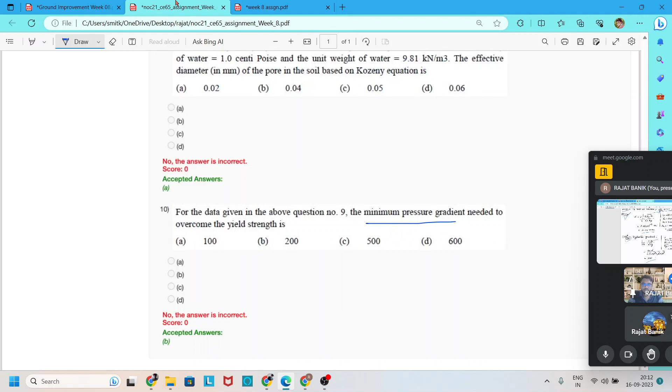During this session, we discussed the grouting material, its defects, where it is used, and what type of equipment we use. After that, we tried to solve and find some equations regarding the injection problem of grouting, and then solved a problem and also a previous exam question.